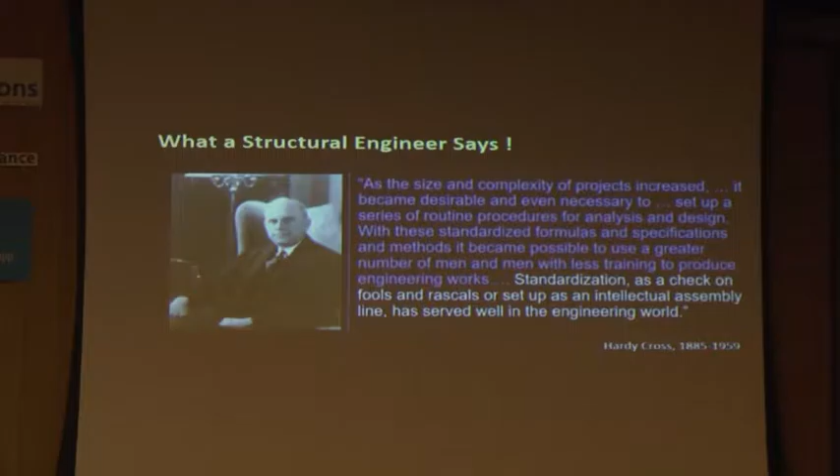So that is the difference, how great minds have thought about innovation and about conceptual design and about rational methods. And that's how the structural engineers differ from others. So if we just continue this discussion a little bit further, if you look at the engineering curricula, we have all been trained like this. Structural engineers are trained to follow the procedures, equations, rules, and be conformists. Follow the code, follow the rules, don't break the codes. We talked about it yesterday a lot.

However, architects and other disciplines are encouraged to dream and to be defiant. And I think that's where the things start to become a bit different between different professionals. And then the friction starts when the architects or innovators or people who create visions meet with the people who want to follow.

They always say, oh, this can't be done. It doesn't follow the rules. It doesn't follow the code. This is not possible. They start with the sentence, this is not possible. And then the other people say, why not? And then the tussle starts. So as structural engineers, I think we are looking for a way to go somewhere in between. Let me give you an example.

If I have a water tank which is 6 meters by 2 meters by 3 meters, and I ask all of you, or structural engineers, even these students here who have done the engineering, can you calculate the reinforcement and thickness for this tank? Most structural engineers would be able to, or should be able to, do that because they can say, oh, I will create a finite element model. In the old days, I will go to the table, I will find a bending moment in the wall, and I can calculate the reinforcement and everything, and it's fine. That's what they do. When you give them the dimensions, give them the control parameters, follow the procedures, get the answer.

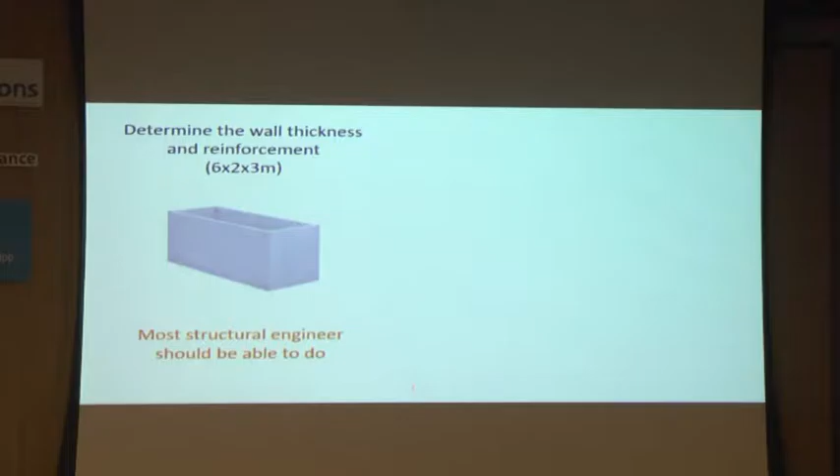Second case, design the most cost-effective water tank to hold 36 cubic meters of water. Do not worry about the shape, do not worry about the material, do not worry about any limits. You are completely free, do whatever you like. How many of you can start this project? Because you will say, but what material should I design? What is the design criteria? What is the height proportion that I should use? And the client says, no, there's no limit, just go, make a water tank.

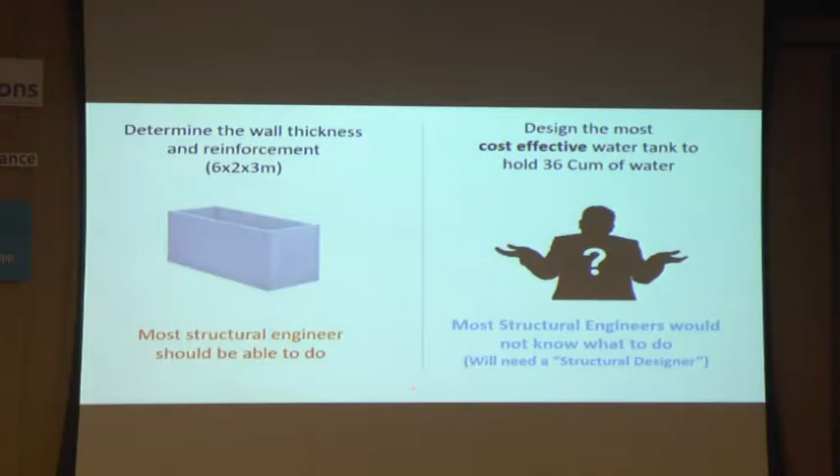And most engineers will not know where to start. They will be totally lost because they're not trained to develop something without clear guidelines and clear instructions or criteria. They always look for the design criteria first. But if there's no design criteria, you can't start because it could be anything. It could be circular, square, tall, short, anything. How do you do that? That is where the conceptual design comes in, and that's what separates engineers from designers and artists.

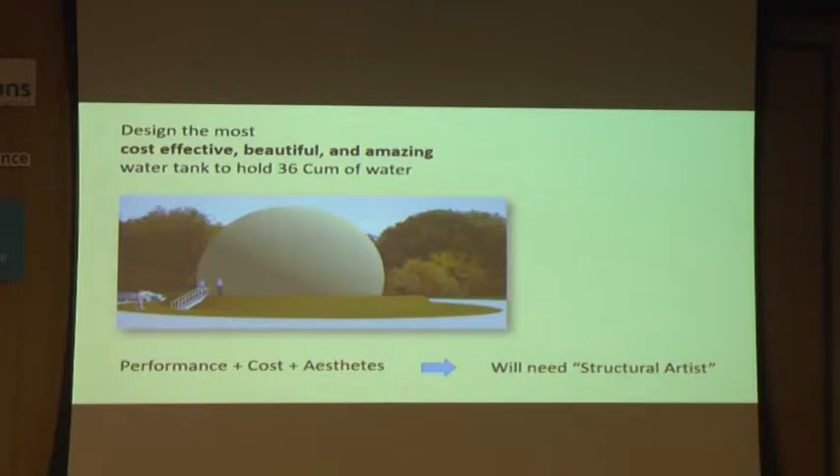Let's go to another step. If we say design the most cost-effective, beautiful, and amazing water tank to hold the same water, very few people will be able to even say, what does amazing water tank mean? What does beautiful water tank mean? A water tank is for water, you're holding water. Why does it have to be beautiful? Why should it be amazing? It's just a water tank, a utility. But no, it can be, it has to be.

Look at this water tank. Whoever designed it looked at the tree forms behind it, matched the form with the trees, set the proportions like that, set the color to match the tree color. Everything is really beautiful, amazing, different. So you can see it's not just a tank, it's now a small sculpture created over there. And this requires a structural artist, not only an engineer, not only a designer, but an artist.

So the concept design now requires more consideration, aesthetics included, color, texture included. And this is what most of us are not trained to do. However, it's not everyone, I said most, there are many exceptions. Structural engineering and art, if you compare the two, you will find there are two ways you can look at it. One is structural engineering in art, that means use of structural engineering in creating art, like sculpture. See, what is the Eiffel Tower?

Who designed it? You know that, right? Of course. Eiffel, an engineer. The tower is named after the engineer who designed it. The whole city of Paris is planned around that single monument or iconic structure. In Paris, no building can be taller than the Eiffel Tower, because that guy designed something so symbolic, so important that the city of Paris is known for it. Millions of people go there, take pictures with it, and want to see it. If you go to France or Paris and don't see it, you haven't been there. So the whole city is governed by that.

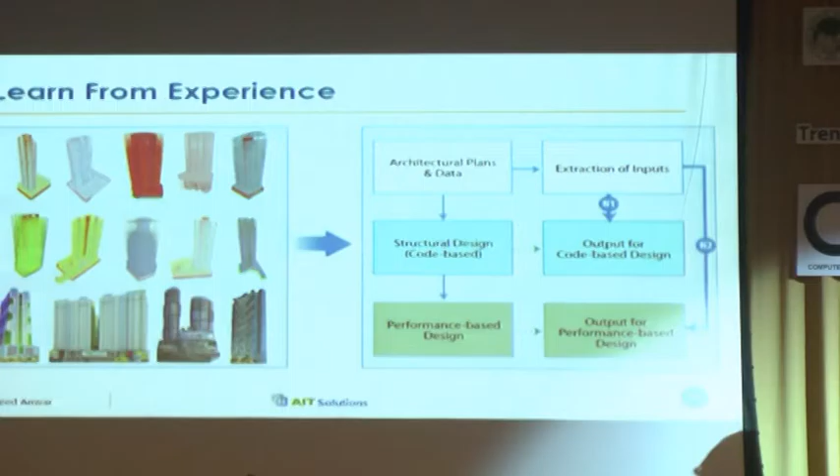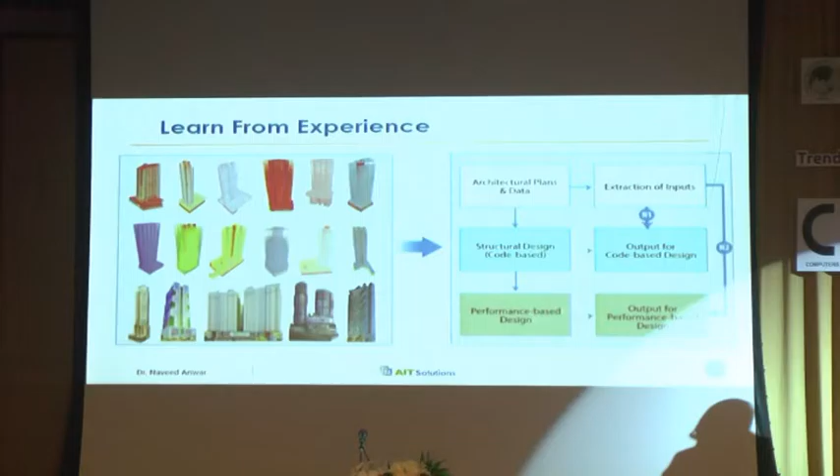So we took 50 buildings that were already designed with the help of our colleagues in the Philippines, SY Squared. We got those buildings, we have done the performance-based design, collected all the data, all the input, and we have done the design, so we also know the results. And then we used that information to train the network to make that decision directly. So architectural input, number of stories, and then from there directly you get the output.

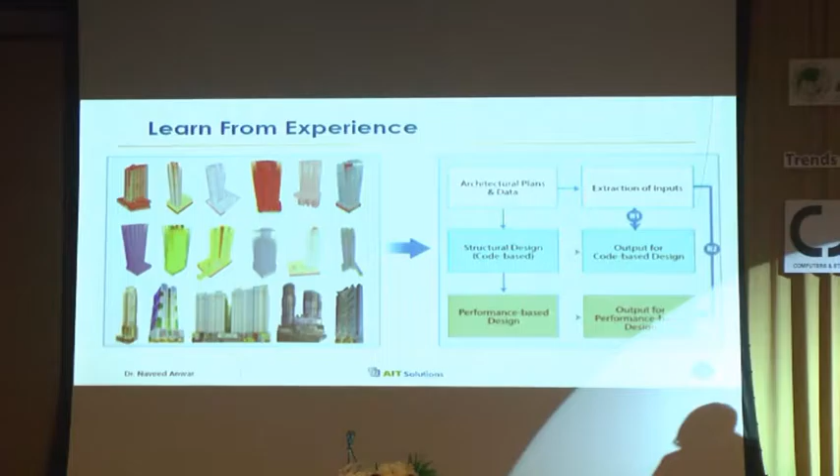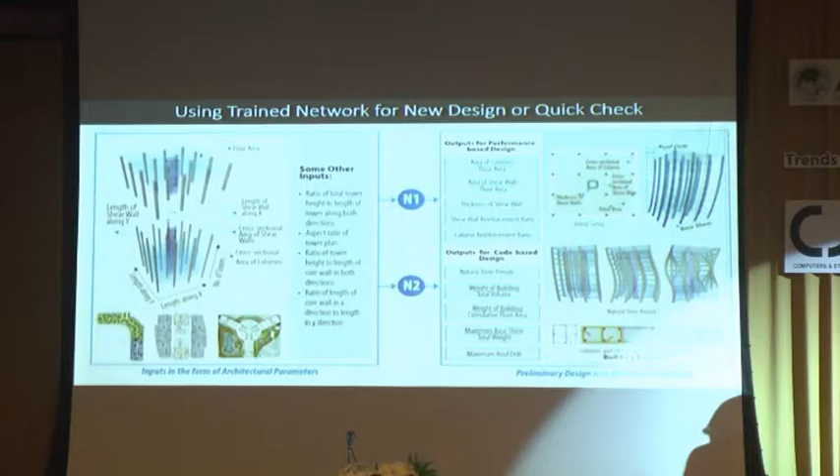Basically the methodology is very long, I don't want to go into the detail. Those of you who are interested can read this paper. But the final output is that you take the architectural parameters, enter them into the system, and you can get the response parameters like modes, reinforcement, wall thickness, and all of those parameters directly without doing any calculation right away. And then we checked, and we found that this seems to work very well.

So for example, natural period, reinforcement ratio, volumes, column sizes, wall thickness, the program can predict without doing any calculation. You just provide basic input and you get the response output right away, and it's very close to the real one for those buildings. And this is useful especially for checking our designs. It's like an experienced engineer sitting over you making sure you have not made a really big mistake, because numbers should be approximately like this based on previous experience.

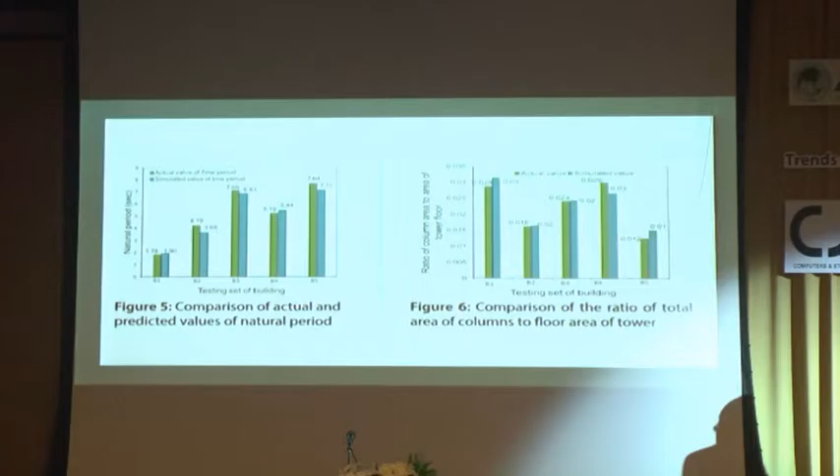Or for a new building, you can go directly and do some quick designs and comparisons. You can check the area of the core, the reinforcement, the actual weight per unit, and so on. Many things, and you can see they're always very close. The difference is not much. And this is only based on a small number, 40, 50 buildings. If we use 100 buildings, 200 buildings, then this will become even closer.

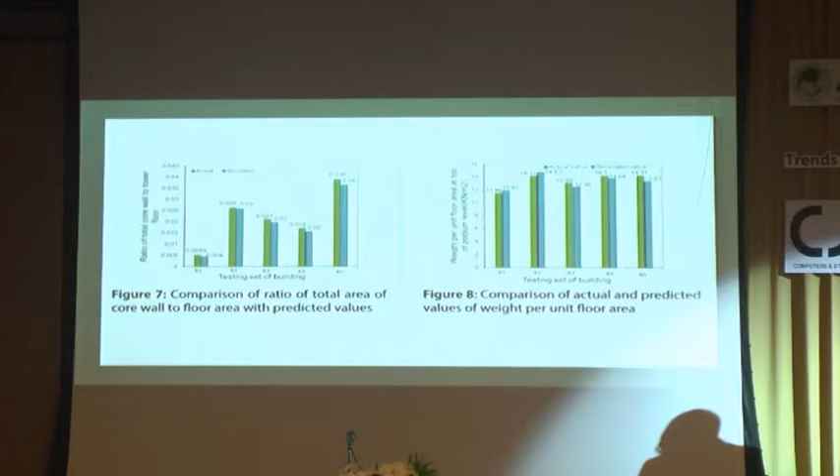And this is what I was talking about yesterday, that now with big data and cloud computing, we can do this collectively as engineers. We can put our projects' basic data on the cloud, the systems can learn from that data, and we can use that to predict our new design very quickly. And we can compare many alternatives, because we do not need to spend too much time on preliminary design. Once we get the final one, we can do the detail. Or we can check very quickly whether our design has reasonable numbers. That is one of the advantages of using these tools.

So now we're talking about the swing towards artificial intelligence, and there are many other things in artificial intelligence that can help us. There was a time when we had 20, 30 years to develop experience. Now we can make use of other people's experience, or our own experience, in a systematic manner. So we can look at things like fuzzy logic, deep learning, big data, data mining, artificial neural network, genetic algorithm, expert system, and so on. I don't have time to go into all of these, but let me discuss a few related to tall building or structural design in general.

So as I mentioned yesterday also, now we are developing methods which are suitable for computers, not making programs to automate the process that we already know. So that's a major change. So now we should be developing methods which make use of the technology rather than the other way around.

Historically, if you see, people have believed that things can be scaled up. So what we did on a small scale, if we just enlarged everything, all the dimensions, linearly, we will be able to do bigger structures. But that is not really true. If you look at nature, we will find that it's not true. The structure or the skeleton of a small animal and an elephant or a large animal are starkly different because the scaling doesn't work in the true sense. But people have been thinking in the past that it does. Now that is not the case.

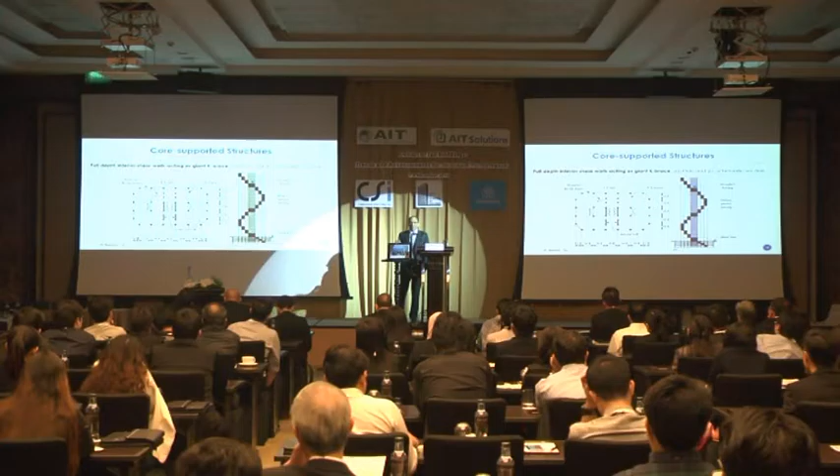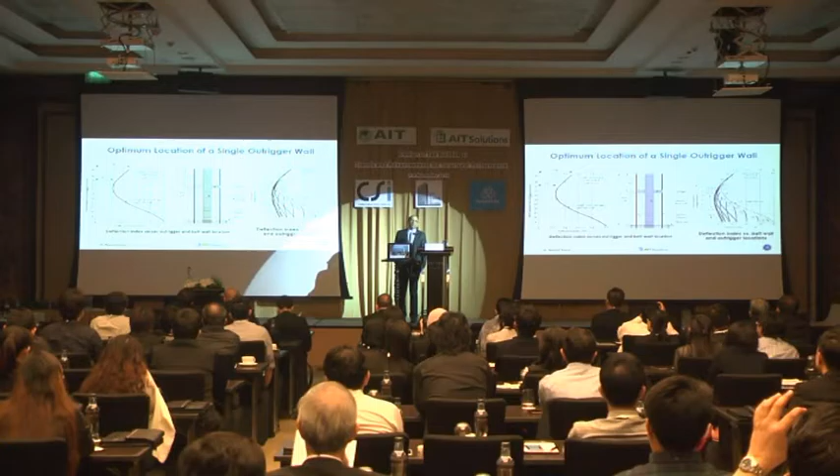So nobody knows a truss exists because we just randomly selected some of the partition walls in the floors, in the apartments, and made them in concrete so they become part of the structure and transfer the loads to the columns. Spine wall systems, outrigger and belt system, very important, very popular. The most important question is how many outriggers to use and where to place them. And this is a study that we always do for our projects to find out what is the best location of outriggers. How many outriggers to use?

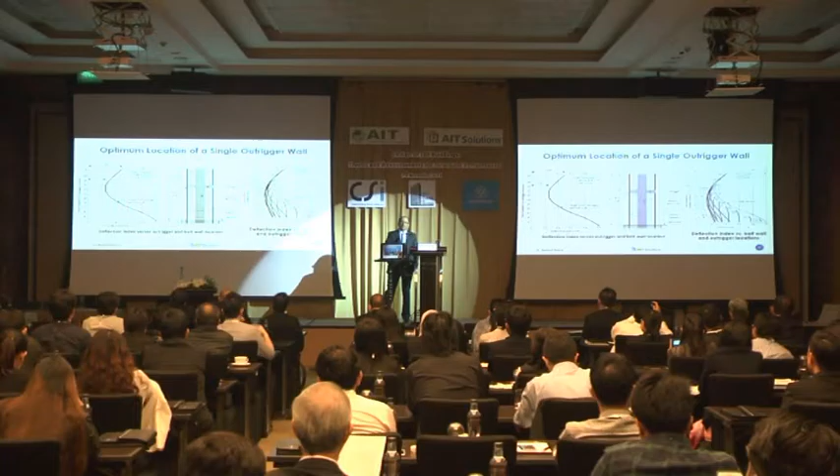In fact, now we have a thesis going on this topic. So these are important questions, and the optimum location of the outriggers can significantly increase the economy as well as the performance of the structure. So this is something that we need to study.

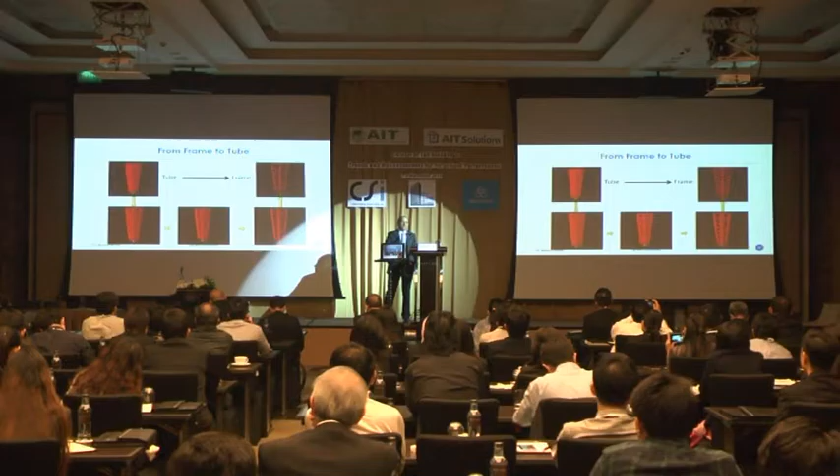Other wall systems, tubular systems, single tube, frame tube. In fact, the difference between a tube and a wall or a frame is just transition. The size of the vertical members and the horizontal members. You start making them thin, it becomes a frame. You start making them thick, it becomes a wall, coupled wall. So somewhere in between there is a tube. So it's a transitional system, not a completely different system. So a complete solid wall to a complete frame, this is just a transition of the sizes of the columns and the link beams.

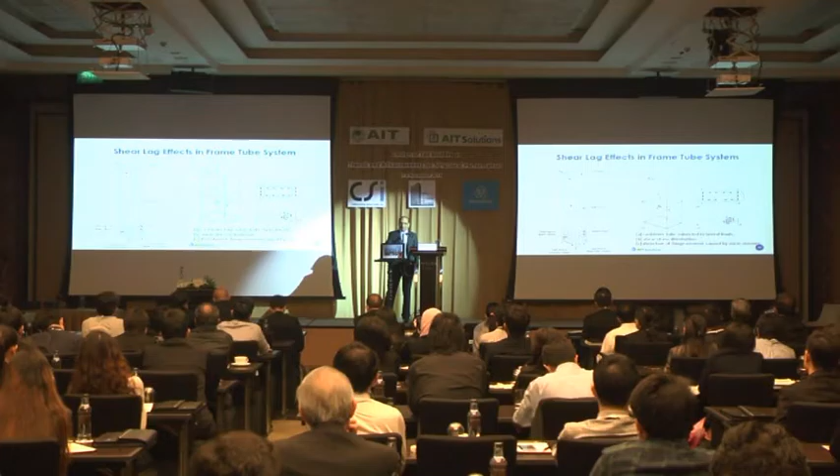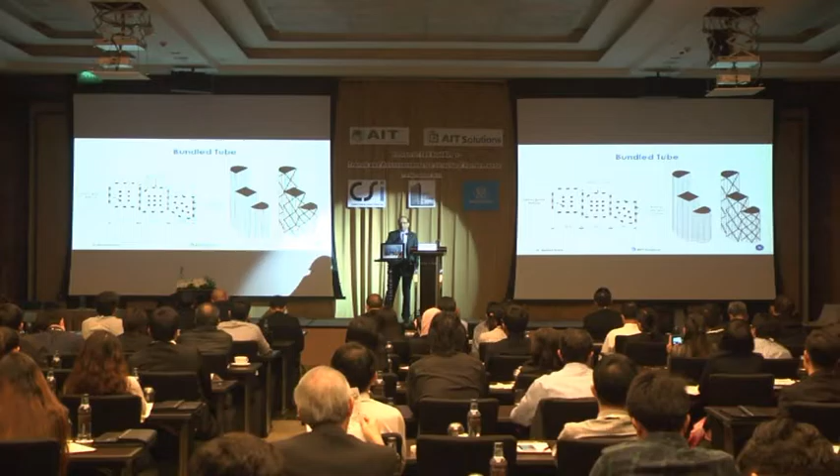Shear lag is an important aspect that we must consider in this one. Irregular tubes, sometimes shear lag can be reduced by putting the diagonals. We have seen in many buildings, we can put the tubes together, create bundled tubes when one tube is not enough. Selection of structural system, I have to go really fast now. Maybe I can discuss this. You can have these presentations later to read more detail about this one. There are many ways to do that.

One of them is rich pictures. And rich pictures is in fact very important to look at things in a big way, from the bird's eye view. Consider everything, not just the structural system. That's why this seminar has many topics to give a broader view of what we want to do. Look at the knowledge models involved in design of the structures.

And this is one thesis done, and Sudiksha is here, who did this thesis. She's an architect by original training. She did a master's in structural engineering, so we thought she's the right person to work on this topic because architectural and structural opinions can be combined together into these rich pictures. So she developed some of this information that I'm presenting. So basically, rich pictures can really help to develop a system which serves many purposes. So these are some of the rich pictures in terms of the collaboration of various professionals, systems.

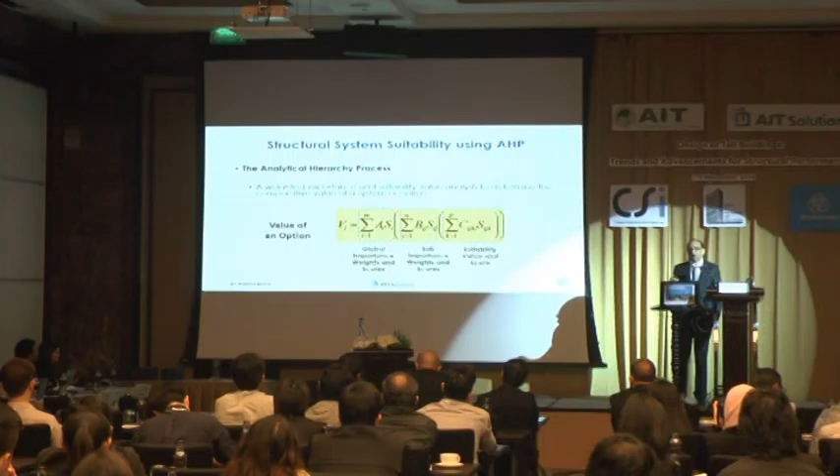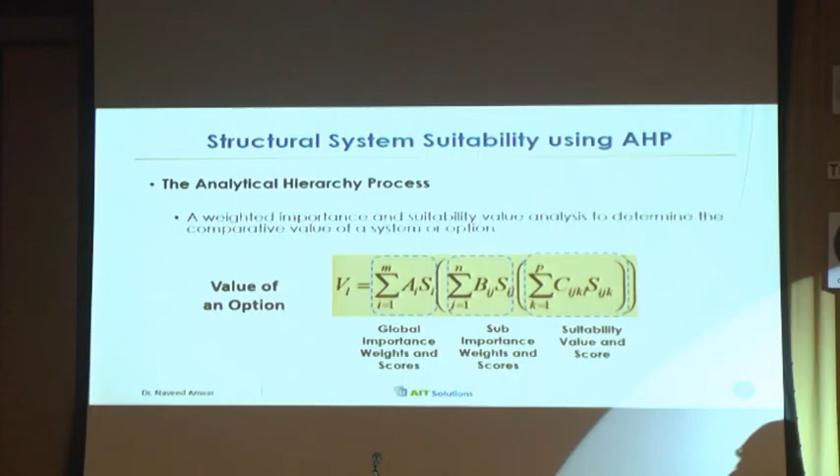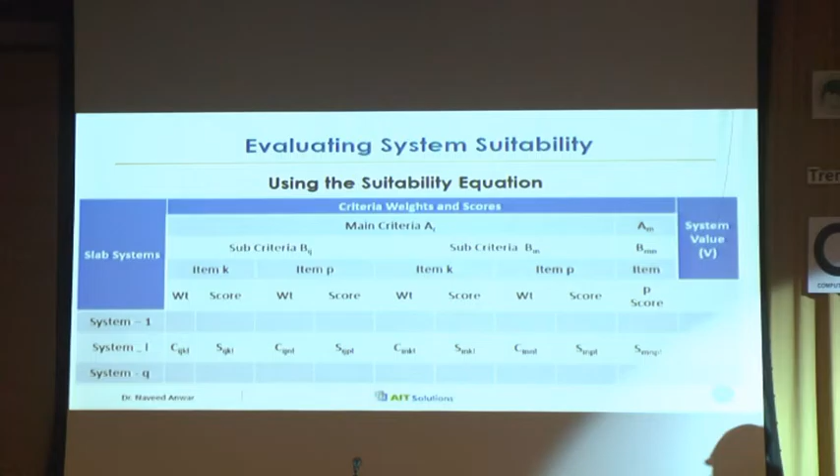We can also use another very interesting and very commonly used process called analytical hierarchy process, or AHP. We use it a lot to compare systems because you can compare the value of several systems by a single value. So it's a very simple yet rational system to compare different options. These are the ways that we do that, and this is scoring, so you can read more about that.